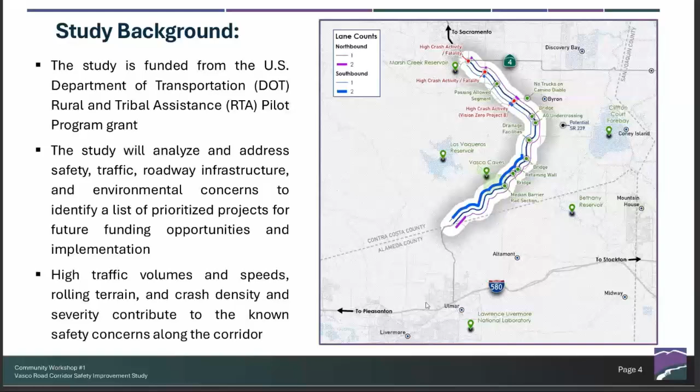The second workshop, held in the summer, is probably going to be the most involved. Instead of this format, the second workshop is most likely going to have tables, with everyone actively involved in helping solve the issue. We're going to have a list of solutions that we come up with, and we're going to see what works and what doesn't work.

The third workshop in September is going to look at the final report. We're hoping to get a full report draft out by the fall, tentative date, where we'll show you what we came up with and the solutions going forward. That's the public outreach section of it.

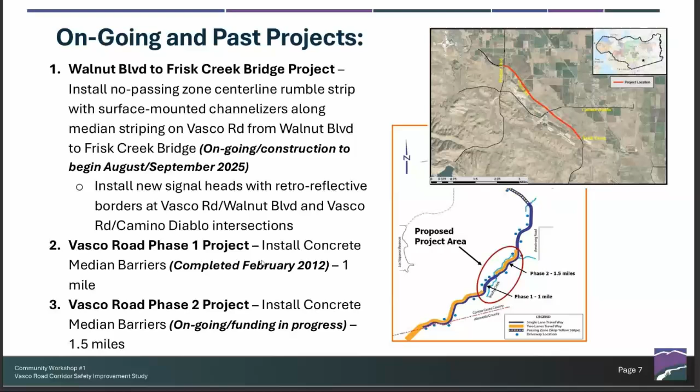So just a quick look at the corridor characteristics. We're looking at Vasco Road all the way from Marsh Creek Road all the way to the border with Alameda County. That's about 12 miles approximately, and I just drove it getting here.

Definitely, it's a principal arterial. A lot of people use it getting to work, going home, so it's very frequently used. I see even on the Alameda side, a lot of people are taking side roads just to get on Vasco, but that's a whole other thing I'm sure they can try to take care of.

But yeah, it's definitely an economic driver. You guys use it, and it's important for the economy of the region. So it's definitely good to take a look at, so we can improve the safety, but also the efficiency as well.

Okay, so now we're actually going to dig into the data a little bit. I know it might be a little hard to see, but the first thing we're going to look at is crashes by year and severity. How California looks at the safety data, the most important factor is usually based on severity, how severe the collision is. You can go all the way from fatal all the way to property damage only.

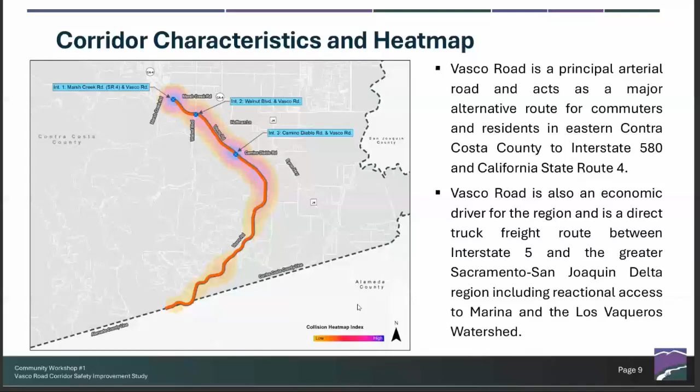These collisions are usually written up by CHP or the police officer writing the police report, they'll put down a lot of that information. So this is where that data comes from, and this is the latest data we're using, 2019 to 2023. We started this last year, but 2024 is still a draft, data is not finalized, it doesn't have all the information. So this is the latest data.

As you can see, the most severe collisions have occurred most recently in 2023. That's where there were 54, the most collisions along this corridor, and also the most severe at 5 - 3 fatal and 2 serious injuries. The next most serious injury collisions were in 2020, but as you can see, there were fewer overall collisions. Since COVID, things have been increasing as more people are going home, so it's kind of expected there's more collisions, and it's also a little bit more severe, which is not the best.

I know we can't avoid all collisions, but what we're trying to do, along with the county, the state, and the U.S...

Department of Transportation, we're looking at trying to reduce fatal and severe injuries to zero. That's really the goal. We're not saying we're going to reduce every collision, but we want to reduce the most severe and fatal collisions, those are the ones we want to avoid. So that's kind of what we're looking at here, and as you can see from the data, that's also going to play a part in how we do our analysis, looking at the most severe collisions.

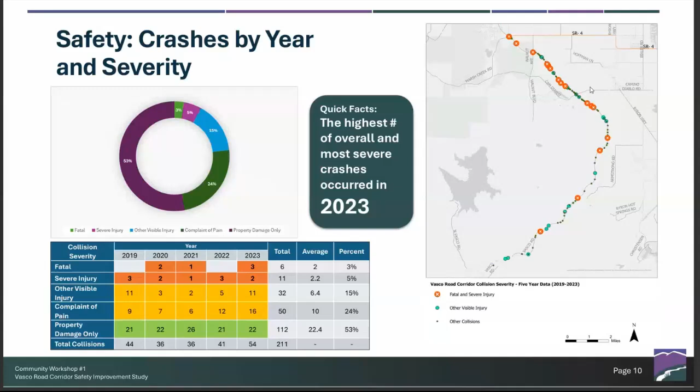I looked at it a little earlier - the morning rush hour is not quite as bad. I think it kind of builds up more on the Alameda side in the morning, so that's where the congestion starts.

Okay, there's a lot of tables here, but I'll try to guide us through this. This is looking at the collision types - so if we first looked at collision severities, now we're looking at the types of collision, how did the crash occur. As you can see, the most common type of collision along Vasco Road is rear end - that's the most prevalent. We're looking at almost 88 rear end collisions, and that's quite high.

It's actually a little unusual - that usually isn't the highest, but what makes sense with that is this is a corridor with limited intersections, higher speeds, and people might not be paying attention. So once they're approaching the intersections, rear ends are happening. It also goes along with what we see with collisions occurring near the intersection - that's also where the rear ends are occurring.

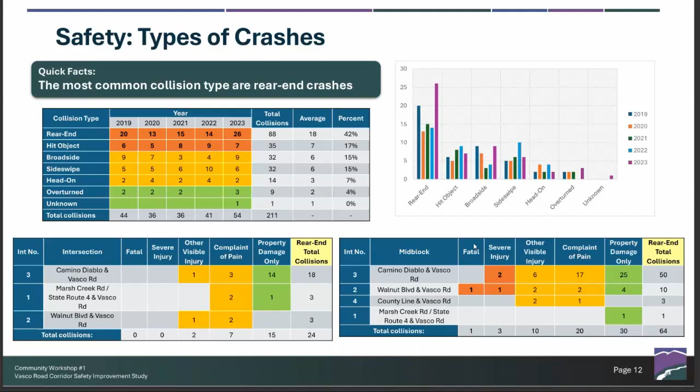But what we do see here is, because of the limited intersections, people can get quite fast. I was even driving today, and the speed limit seems like people think that's too slow - they try to overtake you even at the speed limit. So unsafe speeds are a common crash cause. Over 38% of all crashes are unsafe speeds, and then improper turning is pretty common too. That could be anything from a car on the side trying to merge into traffic at the intersection, things like that.

So those top two are the most prevalent, which is good because we can really focus on those two crash causes. A lot of times it's more spread out - there's DUIs, we kind of have that everywhere. As was mentioned before, we will also have a section on education and public policy. I know engineering countermeasures will be our main focus, but we'll also have a section on what we can do to increase education on reducing DUI effects and things like that.

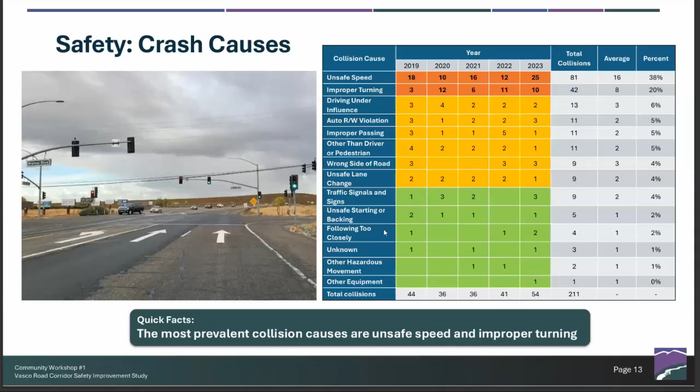And the DUI driving is kind of all over - it's just where it happens. But really, the unsafe speeds are happening on the approaches to the intersections. So maybe they're going too fast while getting close to the intersections and then causing a collision. We're definitely going to be focused on the approaches to the intersections.

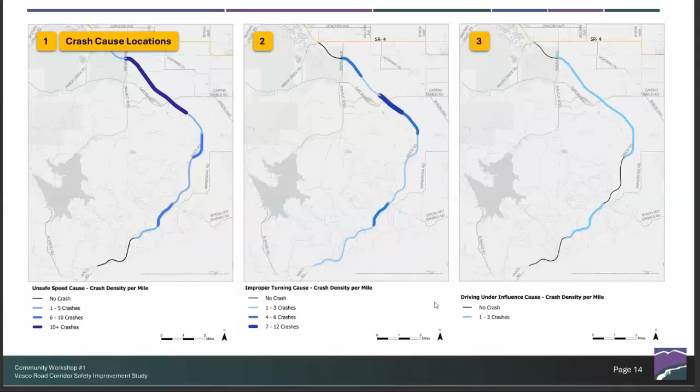Okay, here's another metric we're going to look at - more graphs, more tables. This one is what we call crashes involved, or MVIW - what the motor vehicle was involved with. Most commonly, 77% is other motor vehicles, which is pretty normal. It could be a little higher in other settings like urban areas, but 77% is just crashing between two vehicles. Again, no pedestrians or bicyclists, which is great.

Fixed objects is a little higher than what we'd like to see, so we'll definitely dig into why people are hitting objects. Again, it could be distractions, or maybe we need to make something more clear, like a barrier - put some retroreflective tape on there, something to make things stand out. I know lighting is an issue here too, it's very rural, and the lighting isn't great down south as well.

So you can kind of see like KSI - so again, got the KSIs, which is killed or seriously injured, like mentioned earlier. So we say KSIs, but what it really means is the fatal collisions and the severe injury collisions, which is really important. KSI collisions are 88%, so it's higher than just the average collision at 77%. The most severe injuries, 88%, are with other motor vehicles.

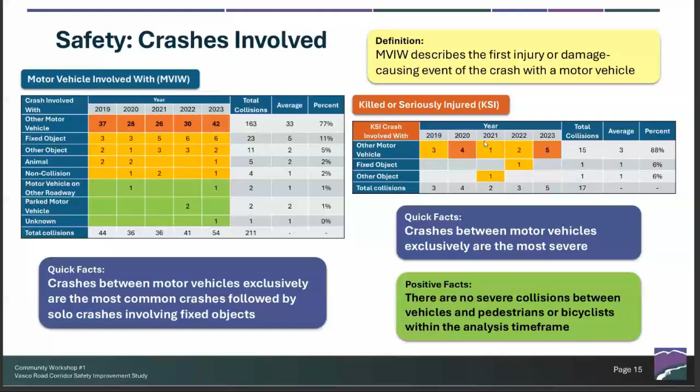Okay, so this one's a little bit more lighthearted. We're looking at the age group, the lighting conditions, so where we see inadequate lighting, where we can improve that. I know there's some laws with maintaining minimal light in rural areas, so there's stuff we can look at improving, especially along the intersections, to help with that as well.

So help increase the lighting. As you can see, most of the collisions are occurring during daylight, but when they do happen at night, they're often at areas where there's no street lights. When officers are out there, they'll say it's nighttime, there's no street lights, so it's completely dark, and that's when it occurs.

And then this age group is something we kind of like to look at, whether it's an educational thing or not. I think for this corridor it definitely is. Sometimes we have a little uptick with older folks getting into collisions, but that's actually not the case here. I'm very surprised with Vasco Road - we have very good 65 plus drivers, but the younger drivers are causing a lot of it, the highest proportion of those causing collisions are under 29 years old.

So that's something we might have to focus on a little bit more for this study, to look at mitigating that, maybe a little more education intervention in the schools to help reduce that number. It's not great to see that most of them are 29 and below, and actually the highest percentage is 24 and below. So that's not great to see.

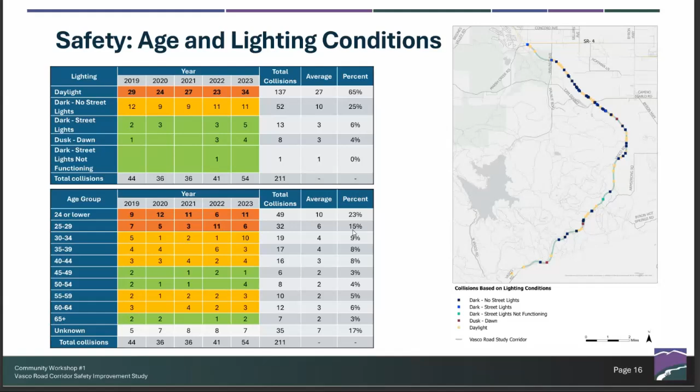So here we're going to dig down a little bit more. We're going to have some crash cost numbers, so I'm going to try to explain how we calculate the crash costs. It might seem kind of weird that we're putting a dollar amount on these collisions, but what this helps us with, and helps with the funding process, is that a higher dollar amount means it's a more serious collision location. The location is rated really high in terms of crash costs. That doesn't mean you need 30 million to mitigate it, but it means it's going to require a lot of improvements, and because you're justifying that, the federal government will be able to assist this process and other funding sources as well.

So how we calculate this, again I'm going to mention KSI, the fatal and severe injuries. The KSIs have a really high crash cost. What this is looking at is equivalent property damage only. Usually you equate a cost to collisions with property damage, but we're using that formula to equate a cost to all collision types. So again, it's arbitrary - it doesn't mean a severe collision is only worth 2 million, that's just how we determine the magnitude of the cost.

Even though there's 50 property damage only collisions, the 2 fatal will win over. The government will see that 2 fatal collisions is worth much more than just 50 property damage collisions where it's not serious. It doesn't mean we won't look at property damage collisions or complaint of pain ones that weren't very serious - it just means we're going to tailor different countermeasures for the different degrees of severity. So definitely the most fatal collision location is going to get essentially the most funding to reduce that crash cost and reduce the severity of that location when collisions do happen.

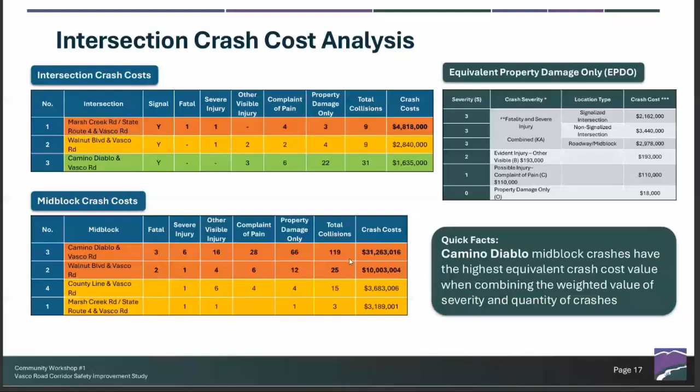Okay, just going to go through this quicker. Oh, sorry, yeah. Oh yeah, sure - doesn't mean it's an estimated number that costs.

No, it doesn't. Like I said, it's an arbitrary factor. It doesn't mean it's going to cost that amount to the county - it's just a way of comparing locations, how severe a location is. It's probably almost not a good idea that they came up with using a dollar value, but really it's just a quantifiable way of comparing how severe the location is. So just because a location has 50 crashes but they're less severe, you still want to focus on areas where the really severe injuries are occurring. So you're basically putting the number - yeah, it's a multiplying factor.

So this is just kind of what we just spoke about, but in a different format. As you can see, again, Camino Diablo approaches have a lot of collisions, Walnut Boulevard has intersection collisions, and Marsh Creek Road has some severe collisions on the intersections. So just taking a look at the locations - I do think, especially later on, if you guys can come up and look at these maps, they'll give you a little bit more detail too.

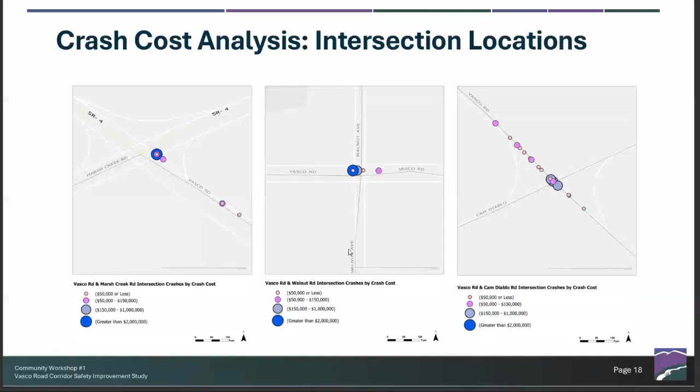Okay, so this is just another way of looking at the collisions. Instead of looking at it based on intersections or mid-block segments, we're looking at it based on segments. We did what we call a cluster analysis to take a look at what segments are most heavily populated by collisions, so we'll take it segment by segment. Cluster 4, which is close to the Camino Diablo approaches, kind of in between Camino Diablo and Walnut - you saw earlier in the previous map there's a big cluster there, so we have quite a lot of collisions there. This doesn't take into account severity, it's just the quantity.

This is kind of showing the same data - cluster 4 has a lot of variance on the approaches to Camino Diablo. And then just the cluster location and the years, highest number of collisions by year based on the cluster. We'll have this PowerPoint on the website after we're done with this workshop, if you want to look into a little more detail. But yeah, just another way of representing the data.

Getting towards the end, this is kind of a quick summary of the findings for the crashes that we looked at. I mentioned a lot of these already, but I can go over it quickly again. In terms of intersections, the Marsh Creek Road intersection seems like it's the most serious for intersection collisions - about 4.8 million in terms of severity.

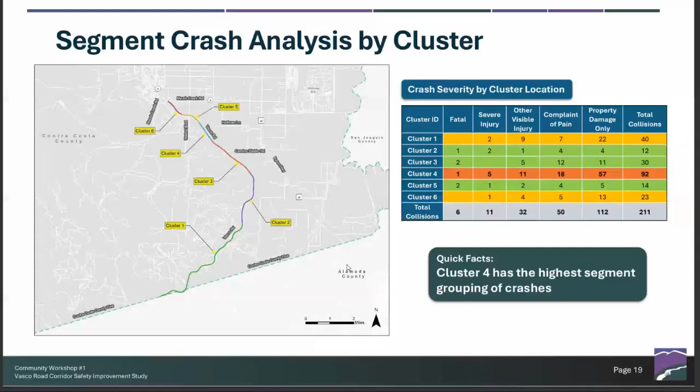Also, what we looked at with the cluster shows that the mid-block segments between Walnut Boulevard and Camino Diablo is pretty serious, so we have to look at that as well. All of this is the northern section of Vasco Road. Intersection crashes are not quite as much — 23% versus mid-block collisions occurring between intersections or along the corridor where there's not intersections. So that's 77% of all the crashes. That's actually why the projects we're working on right now are helping with medians and stuff like that, creating safer driving habits for the mid-block crashes.

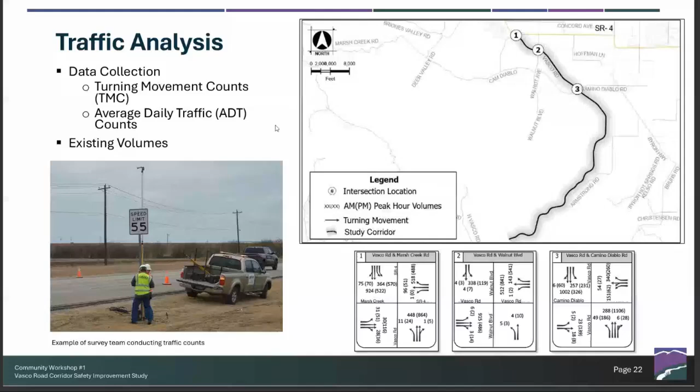Now this is looking at the speed data. I know speed is a common cause of collisions along this corridor. This data shows the 85th percentile speed — we use the closest speed limit, which is 55. I know it's 50 on the Alameda side, but it's 55 for the majority of the segments on the Contra Costa side, and still people are traveling much higher than that. So we have what we call the percentage of vehicles traveling greater than 55, that being the closest speed limit.

Sometimes we use this data to correct what the speed limit should be, but I don't believe that would be the case on this road — that's usually done in a city setting. This is just looking at where people are speeding the most and what we can do to counter that — maybe enforcement, maybe more signage to show what the speed limit is. Do people not see that it's 55? On the segment between the county line and the first midpoint, the first half of Vasco Road, over 96% of people are driving faster than 55. That's really high.

It does feel a bit like a divided highway during that specific portion — some sections look more like a highway, so I can see why people are encouraged to drive faster. But the problem is that as you're approaching where the intersections are, it gets back to a rural two-lane road pretty fast. People aren't aware they shouldn't be maintaining the speed they saw earlier, because with the barriers and stuff they felt more protected, but then it kind of lets off. That's why we're also looking at adding more of those barriers — that's one of our Contra Costa County projects to improve that. We really want to see what we can do to mitigate that speeding issue, whether it's enforcement or signage.

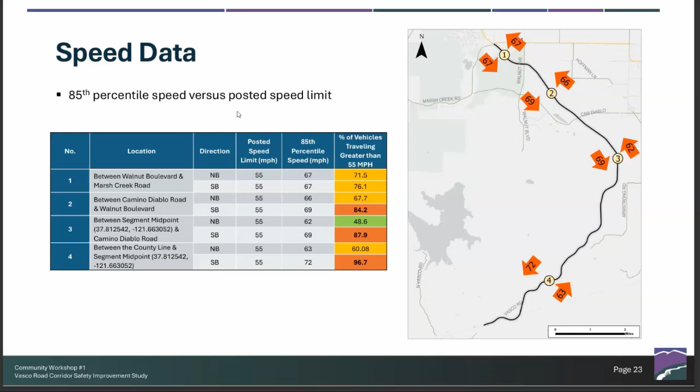So here, we were kind of looking at the speeds. Now we're looking at the traffic capacity, so the capacity of intersections. I know this is a really crazy table, but what we really want to get away from this is that we score intersections from an A to F range, how well the intersection does. Vasco Road's intersections are not too bad. There's some intersections in urban areas and city areas where you can definitely tell the traffic doesn't get through.

What we consider satisfactory is a D or better. I didn't come up with the rating, but D is passing. So as you can see, all the intersections do pass in terms of how well traffic passes through.

There's always certain movements that we see that can show some improvement. Probably one of the worst ones is where you're on Camino Diablo. Screen share. Shoot. Sorry, I'm going to try to share again. There we go, let's see if that did it.

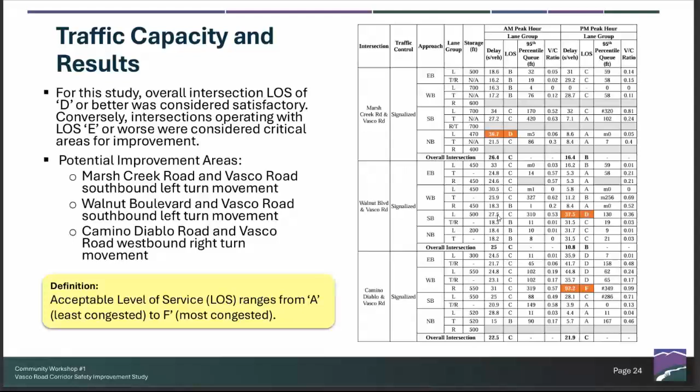The survey is still open until the end of the month. I know participation is probably going to drop off towards the end, but we're going to start looking at the data and show you. Most likely we'll have this posted online as well, just showing what the survey shows in terms of your opinions on the current state of Vasco Road.

And after this, as mentioned before, we're going to look at identifying the safety emphasis areas, the areas that we really want to do a deep dive on for our engineering analysis. Again, Camino Diablo looks like an area that's definitely going to be of concern, as well as a lot of that mid-block section, the mid-blocks between the intersections, and also the approaches to the intersections.

And then we're going to look at some countermeasures we can implement to reduce the severity of the crashes and the number of crashes. And then we're going to develop a list of initial safety projects. So that's what you're going to see, probably a little bit more exciting than this first workshop.

The second workshop, we're actually really going to be working on the maps. We're going to be discussing recommendations, ways to improve the corridor. We're going to have a list of initial projects, but we're also going to ask you for input on that as well. So this second workshop will be quite interactive. And again, the last workshop is more reporting back.

We're going to be presenting the draft report. So really just two more workshops, and we're hoping to conclude this report by towards the end of the year. There's usually a long timeline for this type of report, but we're looking to expedite the process.